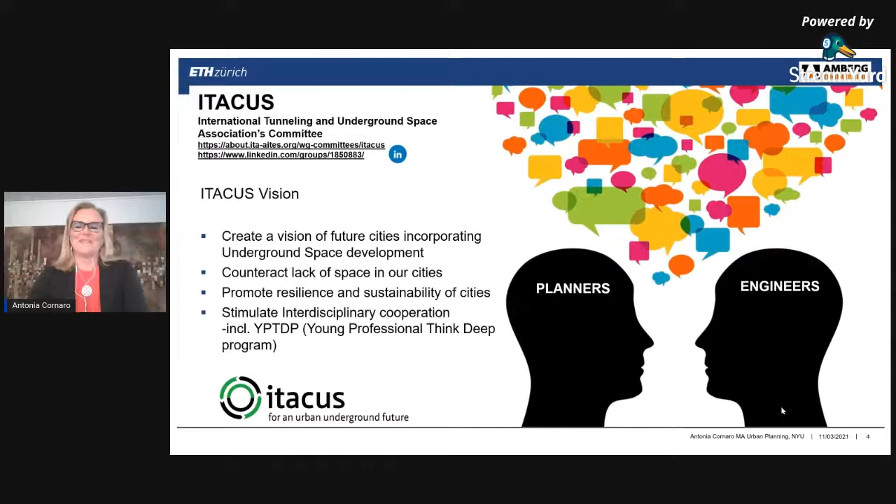I want to also start by saying about ITACUS, the committee I co-chair, that it's very much a committee that looks at a vision of future cities incorporating underground space development. We very much foster a dialogue between planners and engineers and everyone really working in the built environment, geographers and geologists, developers, environmentalists, to name a few, as well as architects, of course.

This is our committee. I'm showing you this because we're a very active committee with worldwide participation and representation. Follow us - we have a LinkedIn page, ITACUS, and we have the web page of the ITA as well. We give a lot of webinars at the moment since we can't travel to congresses in person. So please follow us and join us for great conversations on thinking deep.

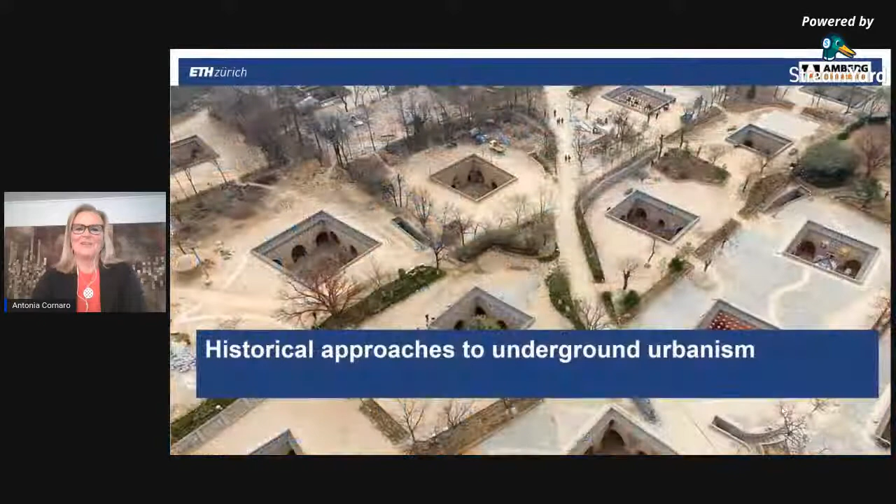Today I will start with the historical approaches to underground urbanism and show you a bit on these yaodongs from China - courtyard dwellings dug into the soil in this very hostile plateau in terms of climate. It was very windy, and the people there had refuge. These dwellings are used till today and very popular because climatically they give the residents a very cozy shelter. They are dug in vertically down, and then the rooms are tunneled in sideways.

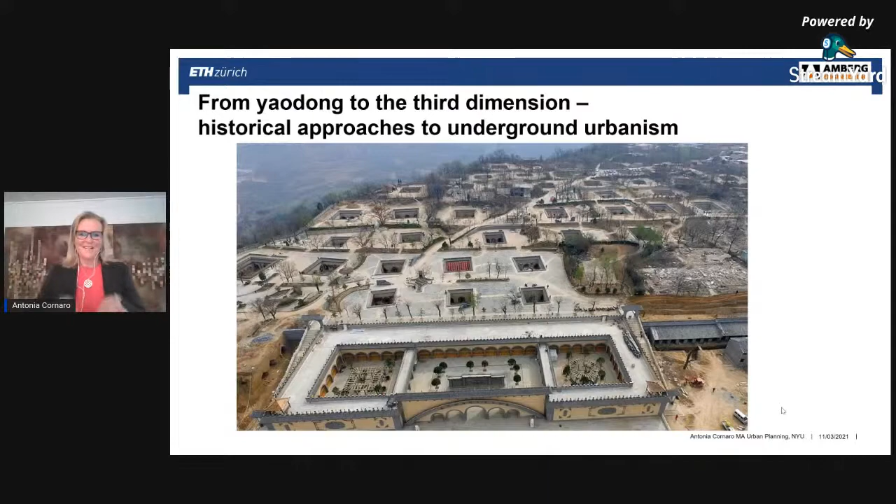Here you see what they look like. And what is great is that you can even bring trees in to the -1 level, and it's like a sunken courtyard development, right?

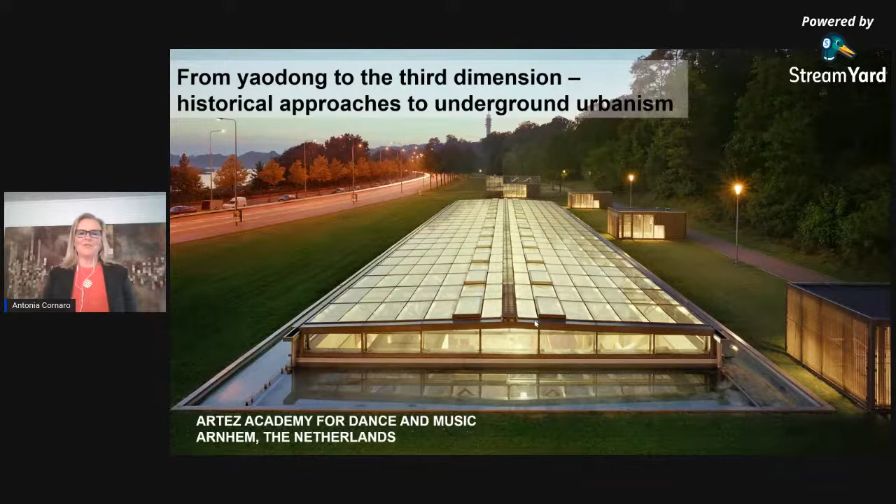How do we bring this form into today's world, into today's underground urbanism? Here, for instance, is an example of the ArtEZ Academy for Dance and Music in Arnhem, the Netherlands, where the faculty had to expand but was out of space and couldn't expand above ground because it's a protected World Heritage site, the Rietveld Academy. So the architect said, let me develop something underground.

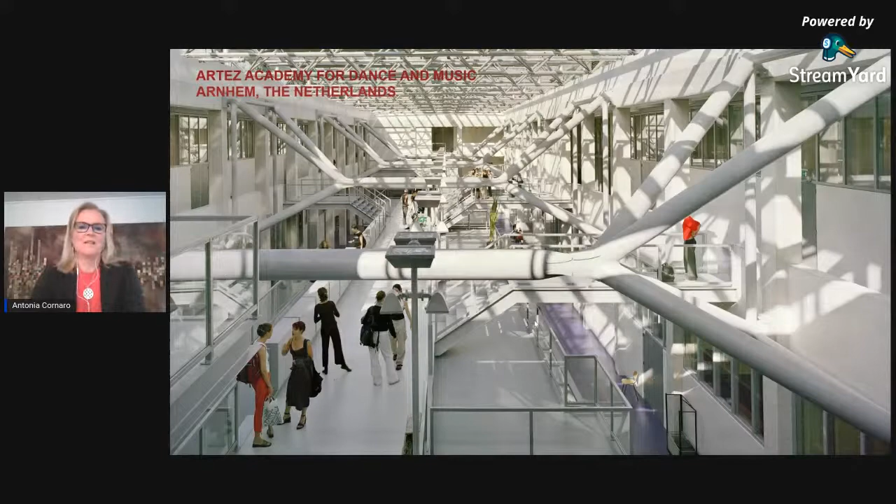It was faced with suspicion, and people were thinking this wouldn't work. But now it's extremely popular, and you see how the space is filled with light. There's a side of light to the sky, and in the room you don't even feel like you're underground. Everybody loves the space, and at the same time the surface remained completely intact, with no obstruction of vision or anything.

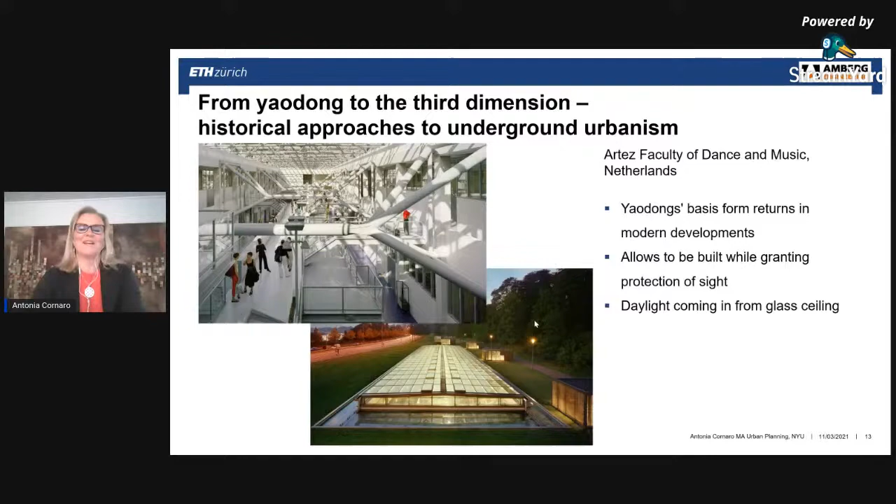Another modern example of how we can take this Yaodong concept forward is, for instance, here in Seoul, South Korea, the Gangnam International Transit Center. This was developed by Dominique Perrault Architecture, and it really connects the Gangnam district in Seoul with another major avenue.

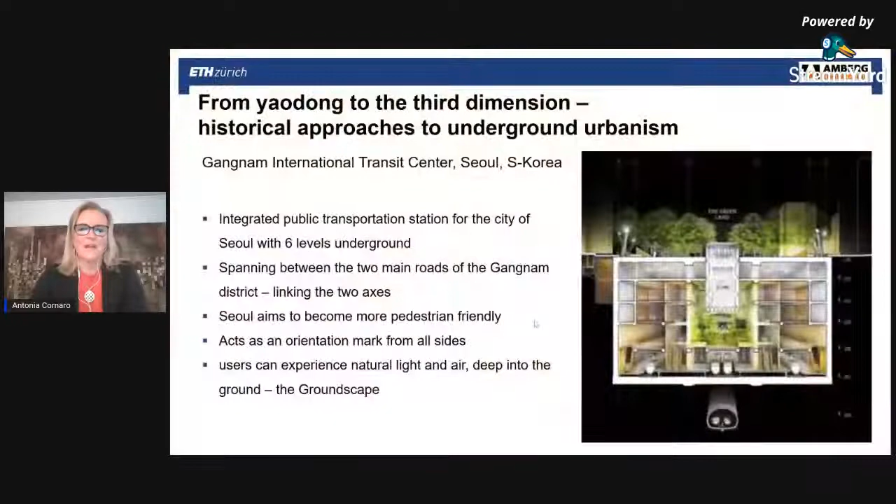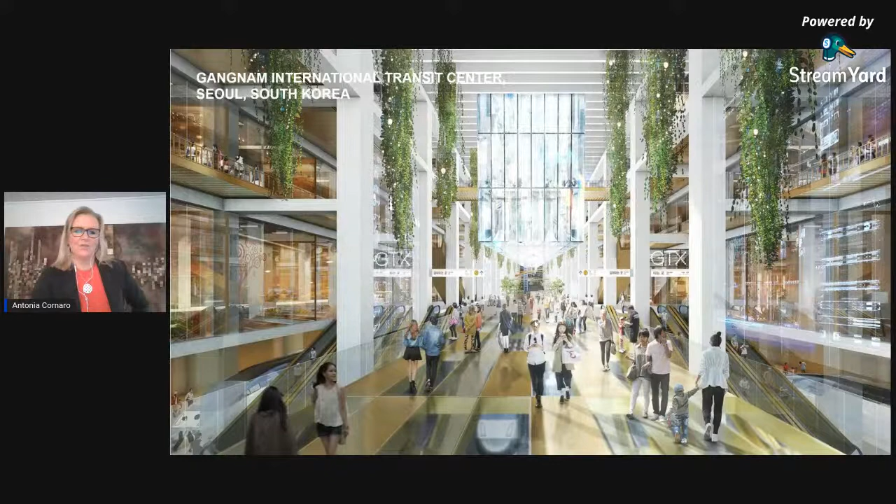And Seoul said we need more green spaces, more open spaces, and we need to make it more pedestrian friendly for our population. Here you see what this light walk will look like, basically spanning a large section of the city with 6 underground levels, connecting to the metro, to shopping, to offices, and even to park spaces underground. You see the lightway on top — that is the linear park on the surface.

Now, I said in the beginning that we have the Yaodong concept, which was basically dug down vertically into the earth, like you see here on the right. But also, since prehistoric time, people developed cave-like dwellings, man-made caves, like this cavern here on the left. This is taken from the long-term strategy for cavern development from the city of Hong Kong, which is really thinking about how we expand in the urban core going vertically down, and how we apply certain uses and relocate them into caverns in the hillsides around the city.

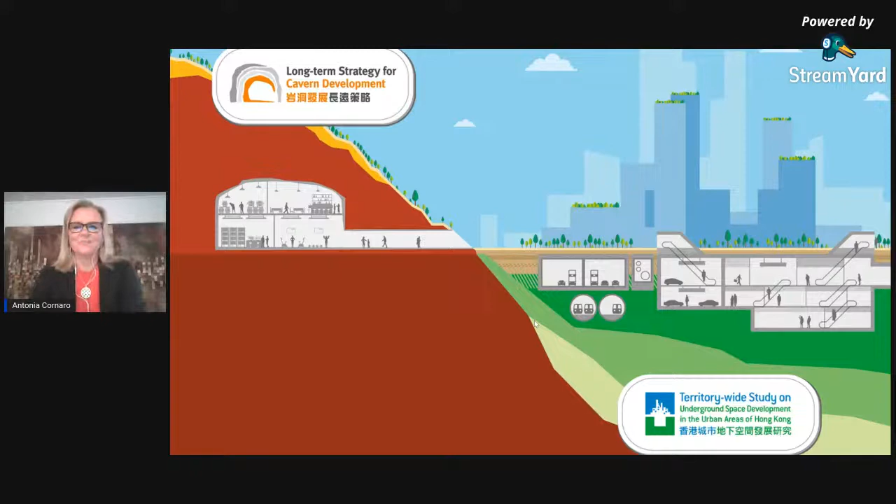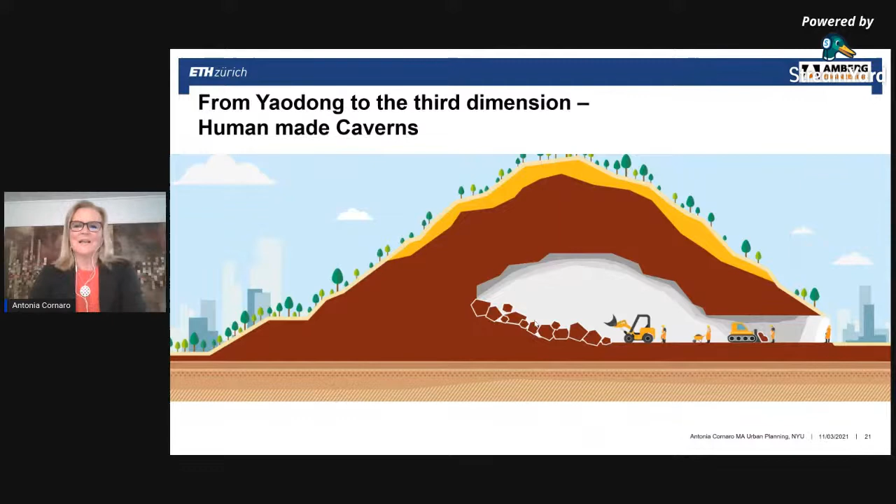These are how one basically makes caves — you're all in the tunneling business, so you of course know about this. And we nowadays have a lot of applications in terms of uses for these caverns.

So this is quite an exceptional one: for instance, a swimming pool in Finland that doubles up as a people shelter in times of emergency.

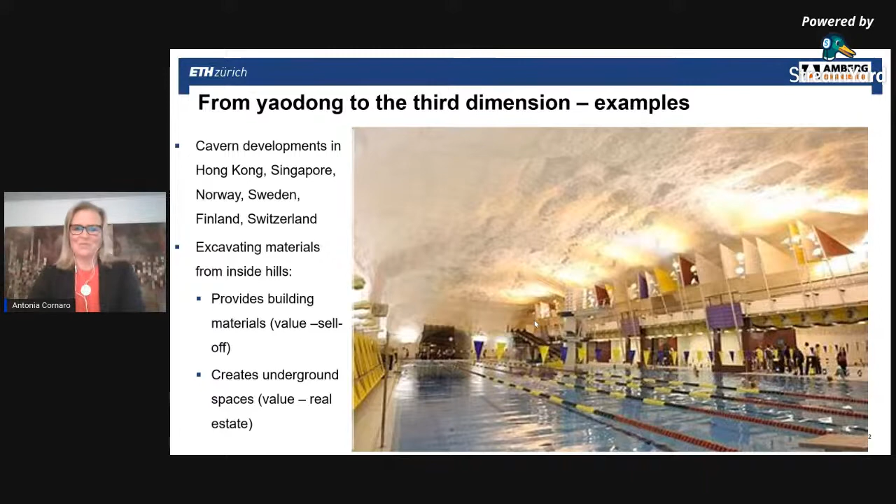In Hong Kong, we're also looking at several large facilities that need massive amounts of space on the surface of the city. Here, for instance, prime waterfront development will be relocated into the mountain hillside. Amberg Engineering is doing a study for the city of Hong Kong together with local partners on this — not just to locate sewage treatment plants in the hillsides, but also other uses that need a lot of space in the core city.

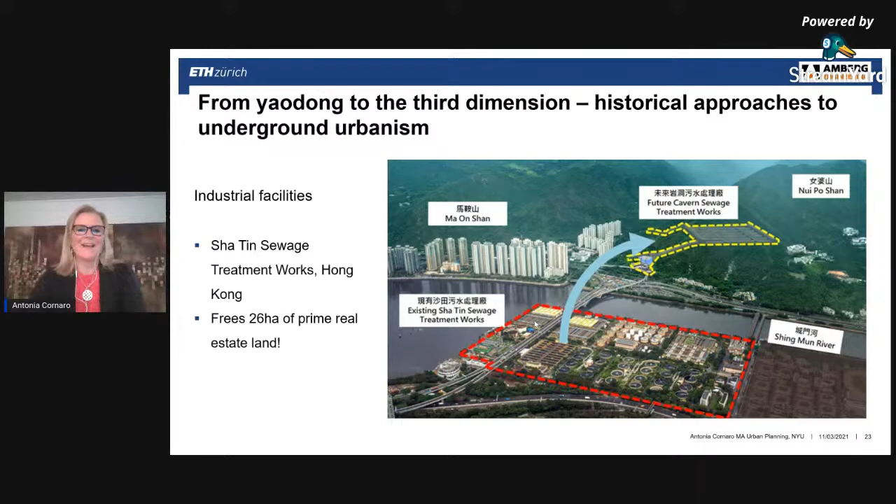For instance, data centers, but also laboratories — things that can easily be off-center and in a cool, safe, protected environment in the mountain, in a cavern. Here you see one that's already realized in Hong Kong, a smaller one. The planned one will be much larger.

But also in Switzerland, we are applying very innovative uses for these caverns. For instance, we're working on prototyping for data centers in underground caverns, and that is all to be seen in the Hagerbach Test Gallery, a large gallery and cavern network an hour from Zurich, where I live. There one can prototype and test applications one-to-one.

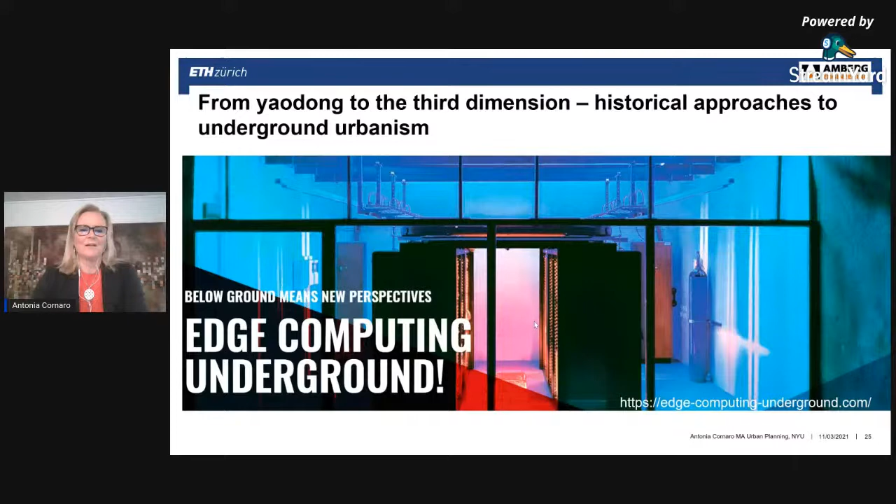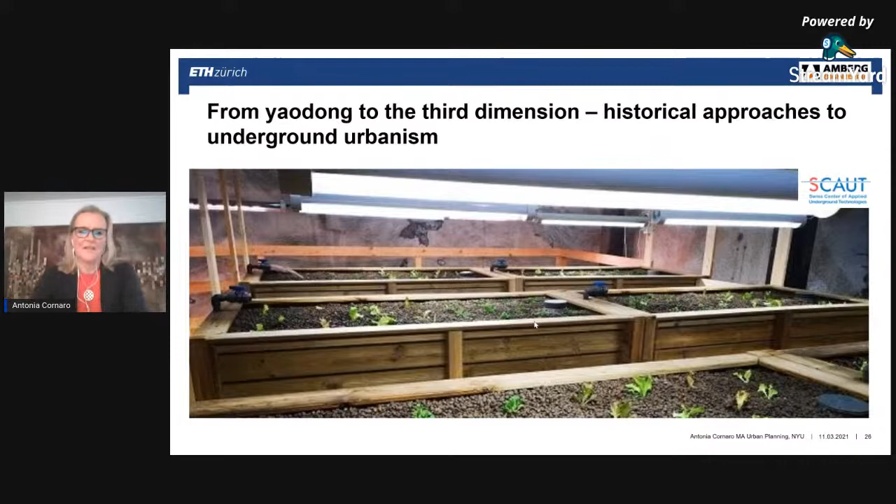We're also working on a prototype of underground green farming. It's not the greatest picture, but we're really growing greens and salads underground, in the cavern, because what we want to demonstrate is that we're running out of space on the surface, and we need a lot of land and water, and we're also very weather dependent on the surface. Here we have the advantage — we can grow 365 days a year in a sheltered environment without pesticides, and needing very little water.

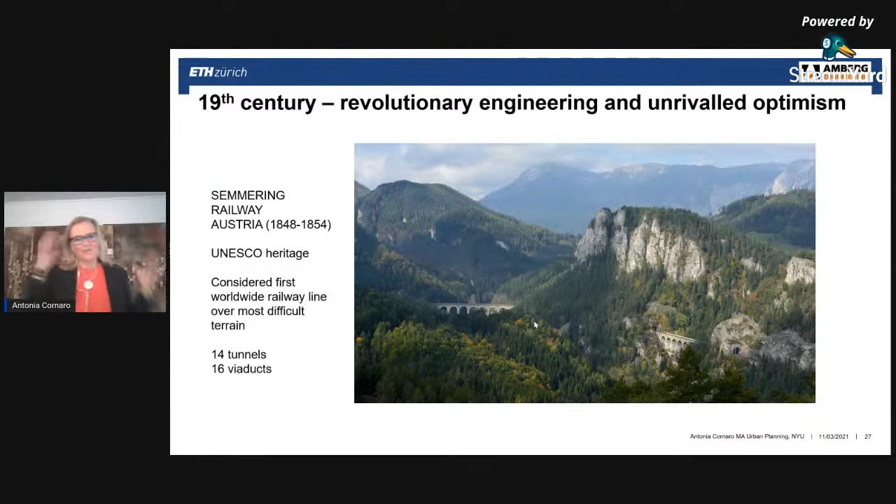A quick look back, because I said to you I'm covering a bit of the past to the present to the future in terms of tunneling.

We had this revolutionary engineering and unrivaled optimism going on in the 19th century when we first expanded our rail networks. This is supposedly the oldest such difficult stretch of rail connection, built from Vienna to Trieste, from Austria to Italy, bridging the Alps, with very narrow gauges, difficult gradients, and very difficult terrain. You see it needed viaducts and tunnels. Now it's a UNESCO World Heritage rail line.

And a base tunnel is being built underneath to really increase the speed and reduce the travel time. But at the time, this was considered revolutionary, in terms of covering space, conquering terrain, conquering difficult terrain, and really conquering time as well, because rather than having to go with the horse carriage over these difficult alpine passages, the train was significant, huge progress, and tunneling was a big part of that.

And what I want to point out about that is this revolutionary engineering and unrivaled optimism that was taking place at the time.

One thought of projects like the tunnel below the Strait of Gibraltar, the iron tunnel below the Bosporus, the tunnel under the Sont connecting Denmark and Sweden. All of these projects took like 100 years before they became a reality. And some are still on the drawing board.

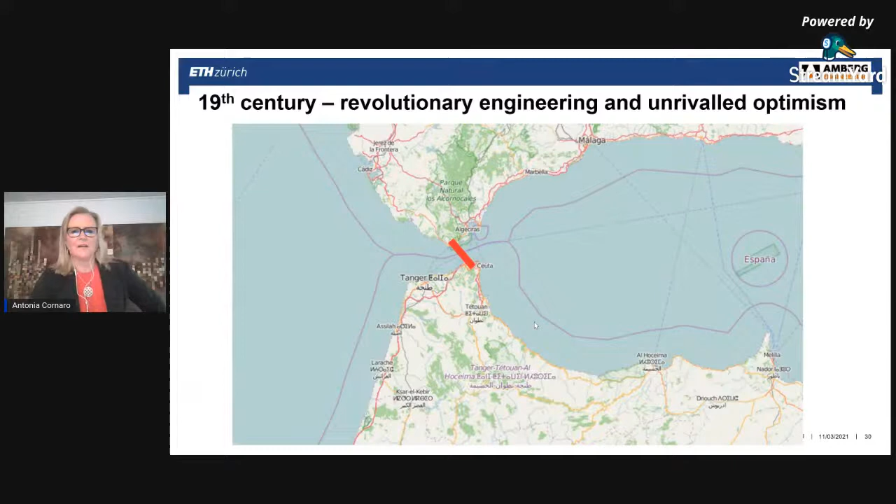Here you see the one on Gibraltar connecting Northern Africa and Spain. We worked on this feasibility study, but you can imagine how difficult it is to bridge two continents along a major fault zone. But not only that, there's of course the political aspect. It has to be the right geopolitical project. And at the moment, this is probably off the drawing board.

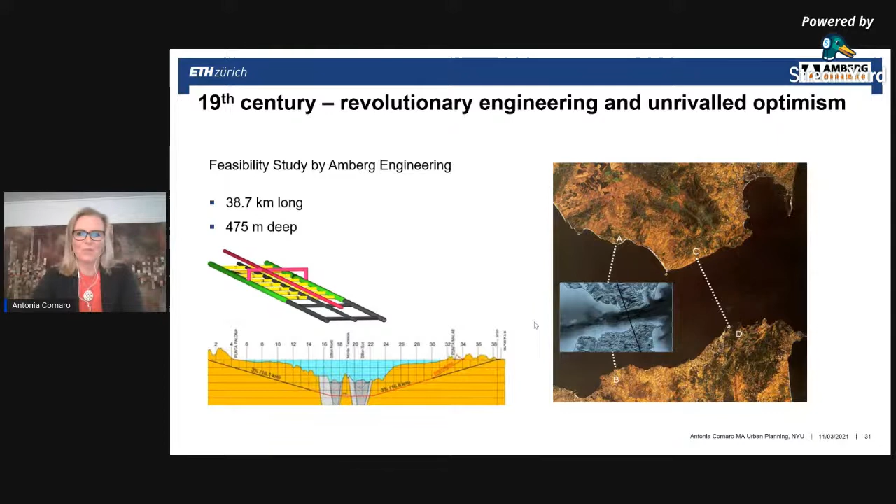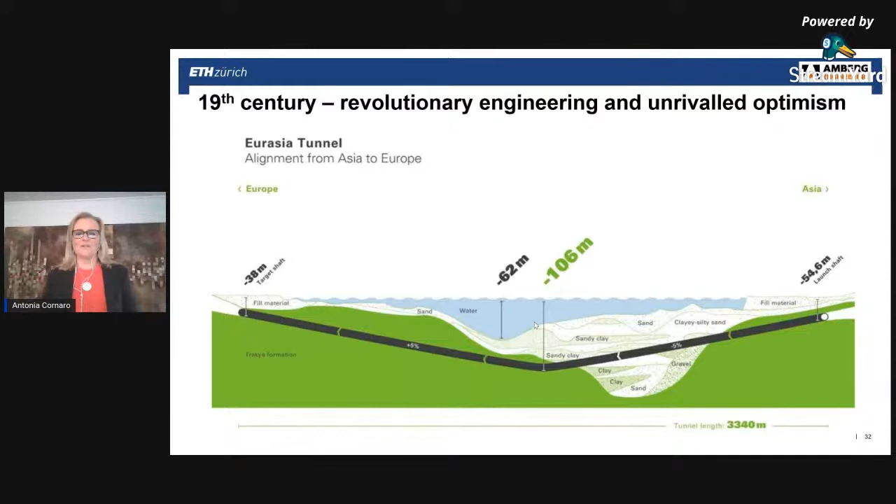But I'm sure this will once again be talked about in the future and probably realized, like this project of the Bosporus crossing, tunnel connecting Asia and Europe in the city of Istanbul, which was also a huge engineering feat to get realized.

As much as the tunnel connecting Denmark with Sweden, really creating out of two different countries one economic zone between the cities of Copenhagen and Malmö with this tunnel. Here you see the bridge, and then the tunnel disappears underneath the sea and connects to the mainland again.

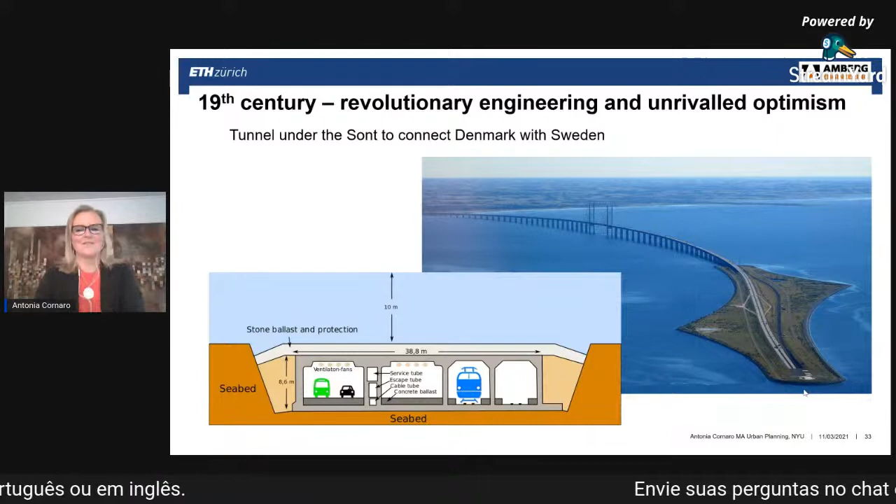So the art of convincing is what is needed, especially back then. This is, for instance, the first under-river tunnel, built by Brunel, a very famous British engineer at the time. He was convinced he could do this, but his tunnel kept being flooded, and he kept trying.

And of course, it's a trial and error thing. He had to then convince his investors and the major politicians backing this project to come into the tunnel and have a banquet after he managed to make it dry, saying, we're getting this project done. They were so amazed by this that they said yes, absolutely, and kept backing him, although the project was delayed and took more time.

But what I'm saying is it takes this optimism to really revolutionize engineering. And I think we have really managed that. And in the sense of urbanism and underground urbanism, so much has happened as well.

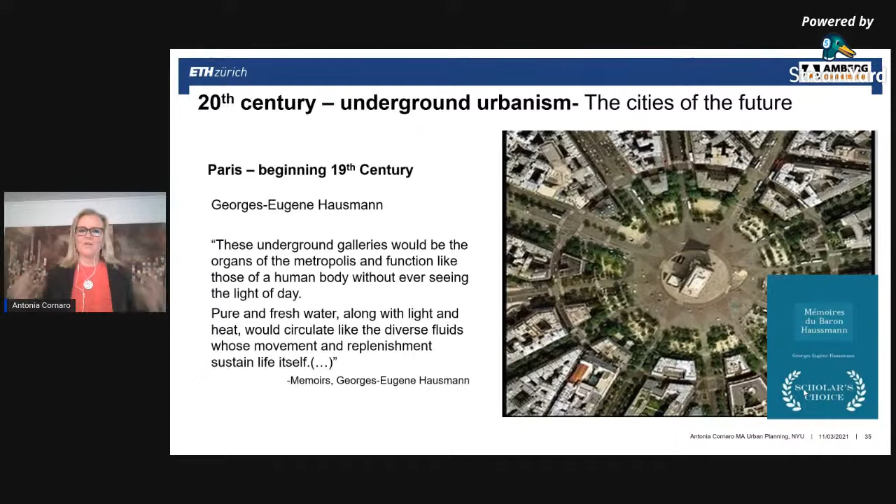In the beginning of the 19th century, Paris was first laid out in terms of these grand avenues and boulevards. It was actually this gentleman, Baron Haussmann, who said the underground galleries are kind of like the organs of the metropolis, functioning like that of a human body without ever seeing the light of day. He also said we can carry pure and fresh water, we can carry light and heat, and all this movement can be in the subsurface, and that will actually help us develop our city.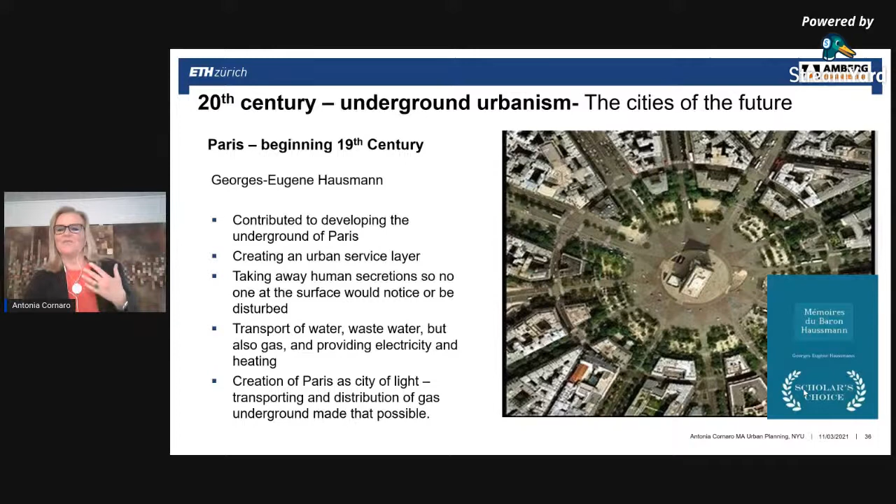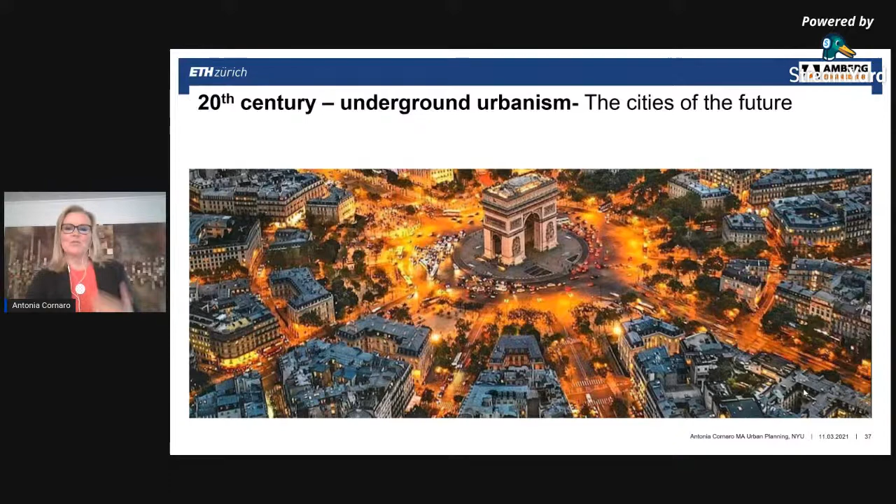He really created this urban service layer for Paris, transporting waste and gas, and amongst all he wanted electricity and heating, and he wanted Paris to be the first city in Europe that would have light. That's why Paris is called the city of light, because it had this very early network of gas and electricity distribution in its underground. To this day, we all know it as the city of light.

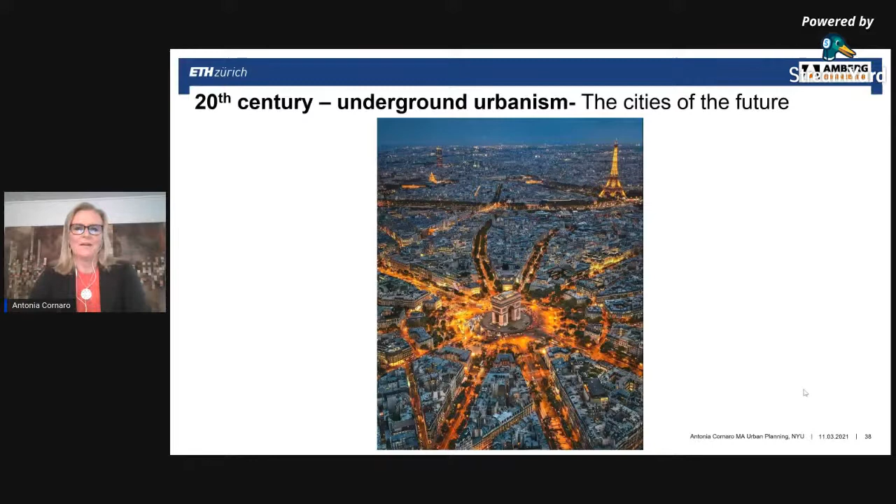But it took very early thinkers to come up with schemes like that and push them through. Another very early thinker in France that I want to highlight is Édouard Utudjian, because he was really the first who created a committee on the urban underground, interested in underground development.

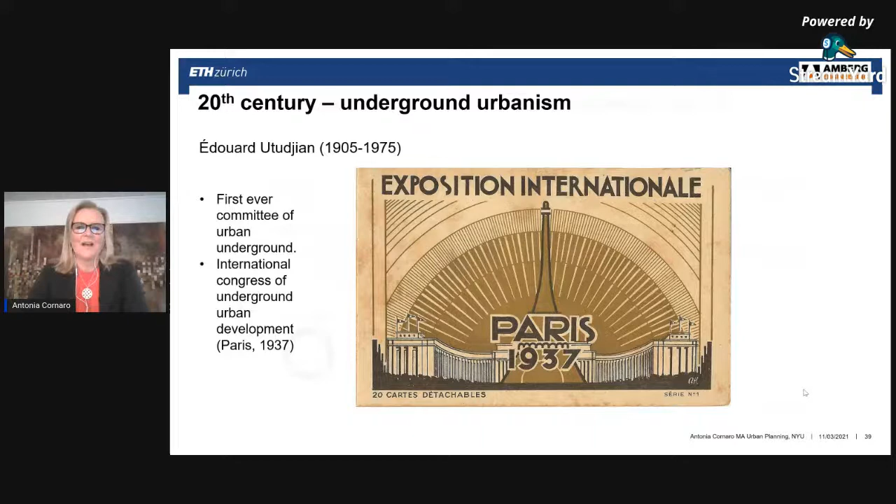And he made an Exposition Internationale. He's really the forerunner of the French Tunnel Association, which is very active to this day. And all these early urbanists and thinkers were sort of the forerunners of what is today the International Tunneling Association. First it was called International Tunneling, and now it's called International Tunneling and Underground Space Association.

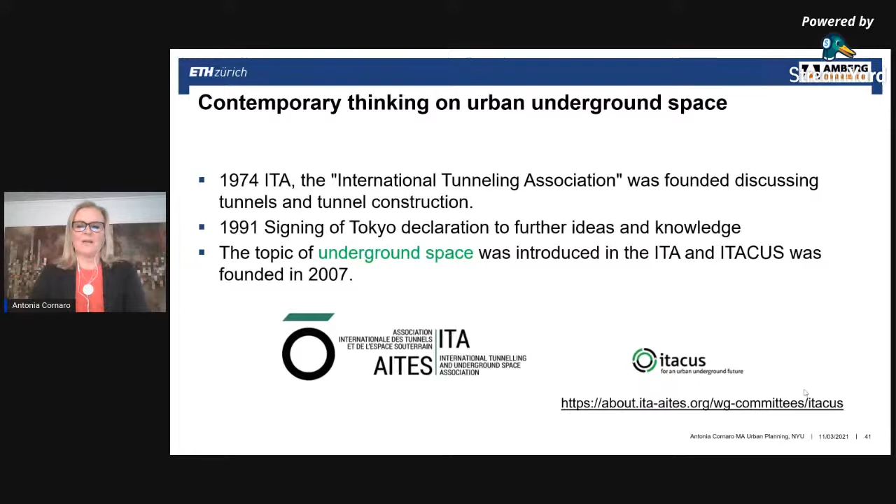Because we're not talking about tunnels being the linear connectors for transport or utilities and the like, but also the whole space in the subsurface and how that is used. And that's also where ITACUS, the committee, comes in that I co-chair. Here you see the web link of the committee, which is also found on the ITA website.

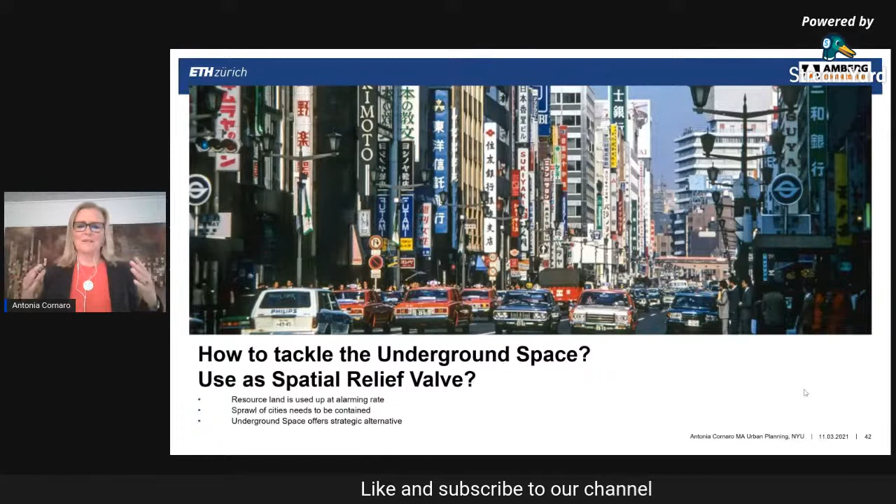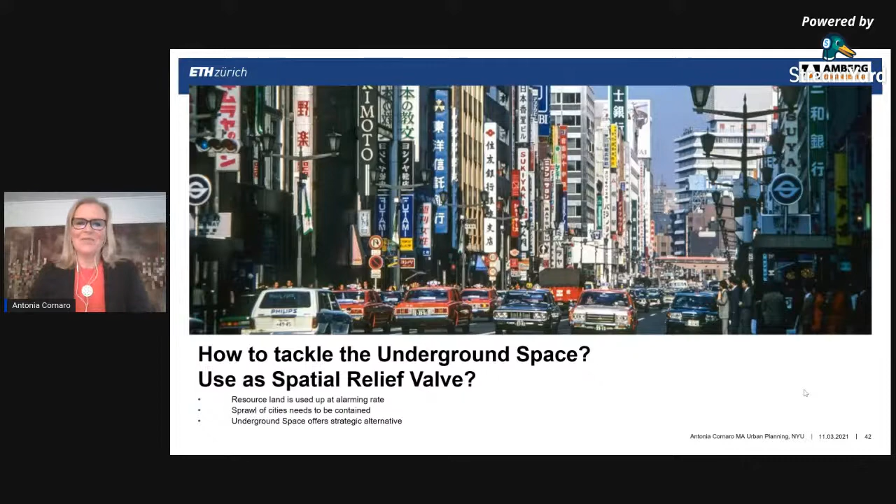Now what we need to ask ourselves is how do we tackle this underground space? We've seen in the past, people already used it for habitation very early on. It protected them, it was a shelter. But then it more and more gradually was seen as this urban service layer, like let's ban everything that we don't want on the surface into the subsurface.

And that is something where I think it is a much better resource than we think, and that we're giving it that status. So just quickly blending in this sustainable cities and communities goal of the United Nations - there are 17 goals in total to improve our cities and life on the planet going forward, but the one on 11 is the sustainable cities and communities one. And we have to ask ourselves, how can we use the subsurface to make our cities more resilient, more smart, more sustainable, and more livable?

How can we future-proof our cities using this precious asset that we have below our feet?

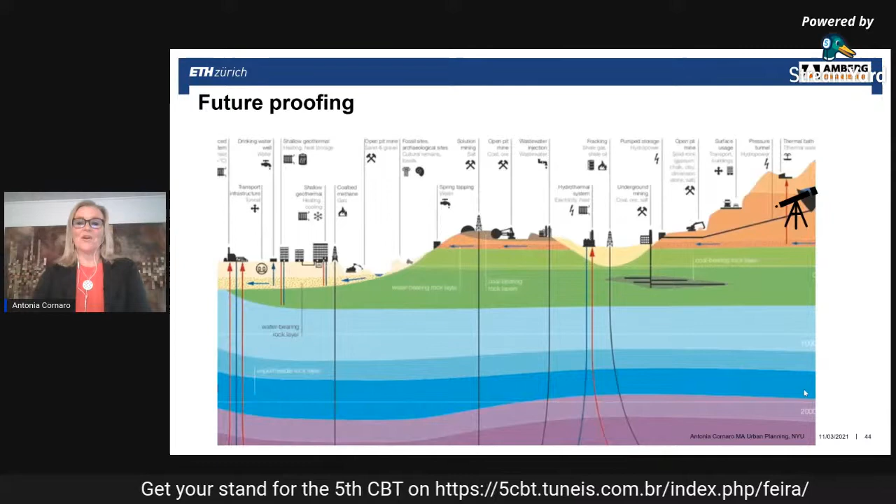And this is where disaster risk reduction comes in, and there's a whole United Nations office dealing with that. ITACUS got them to incorporate this wording in their policy statements, saying that it was important to design large underground spaces, for instance car parks or tunnels or other underground structures, because they can serve a variety of disaster risk functions. They can hold off stormwater when a city is flooded, as temporary water retention. They can be refuges, vital connectors for emergency relief, but also communication lines, and then of course for water, energy, and waste removal. So all these are incredibly important functions in keeping our cities afloat.

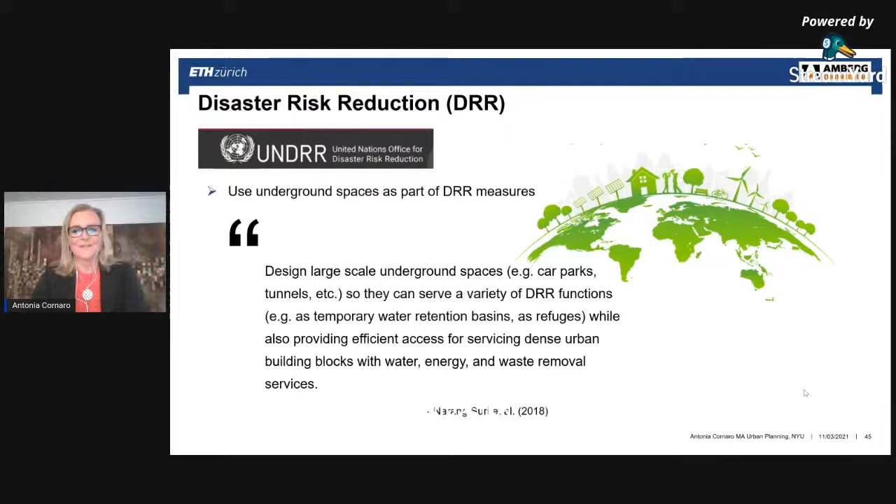Here we see some examples quickly, like the threats of climate change. We have more frequent, highly intense precipitation in our cities, and when we don't have urban drainage or sufficient capacity, you all know what happens - our streets get flooded. There are some very clever examples, for instance here in Rotterdam, where this underground car park can also function as a stormwater runoff facility.

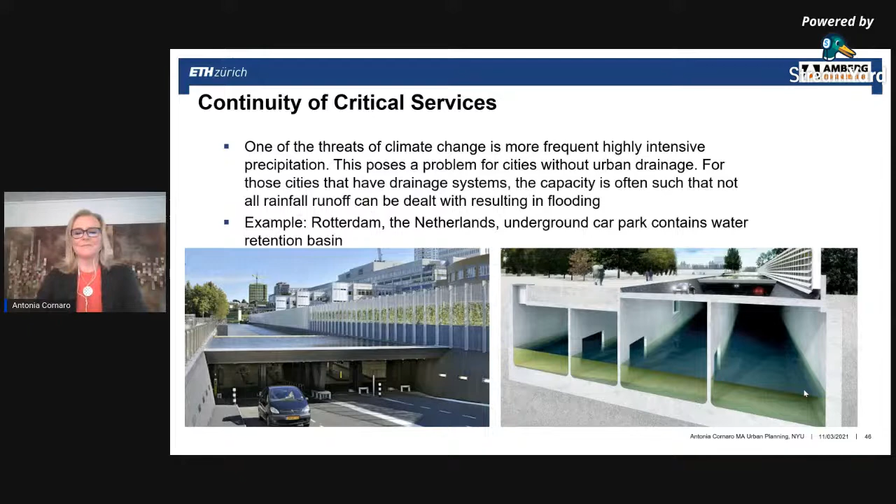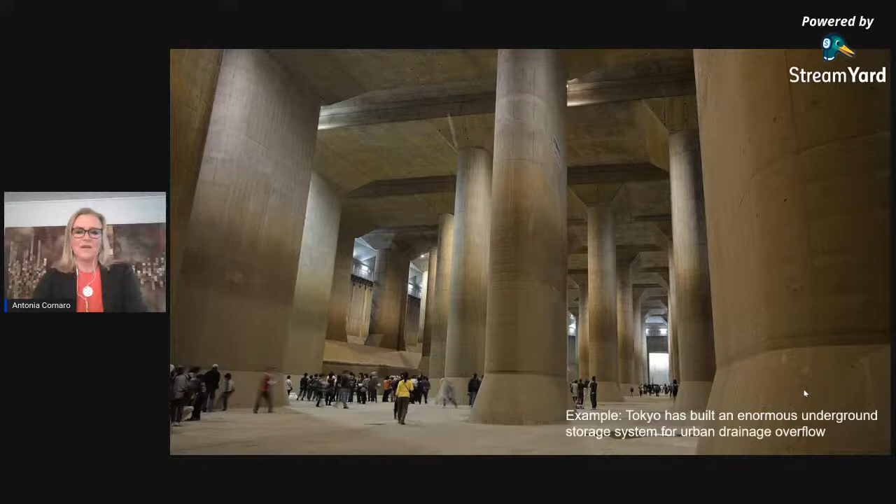As first one deck gets closed off for parking, and if necessary both decks get locked off for that. For instance, Tokyo has built this enormous underground system for urban drainage overflow, which is like a temple-like structure. And here you see how, for instance, the city of Prague is dealing with a 90-kilometer long network of utility tunnels serving the city - pipes, steams, water mains, high and low voltage cables, and telecom.

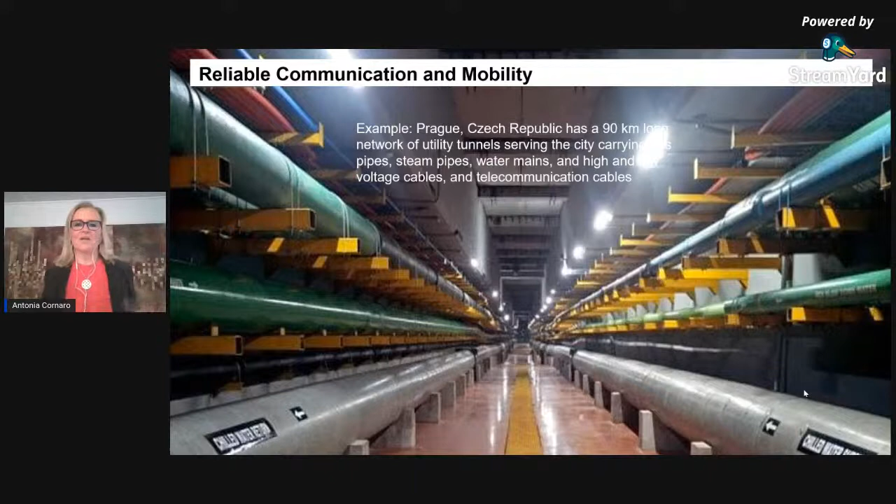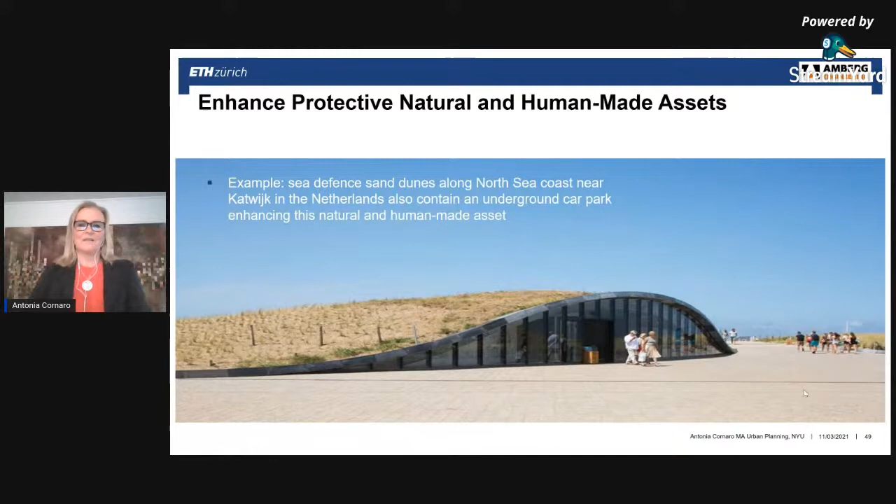And also we have sea defense measures that can double up with an underground function. For instance, here in the Netherlands, that is a sea defense dune to the North Sea, which is very strong in the Netherlands, a very low-lying country. And they made these very clever structures that have a dune-like effect and shape, but at the same time are underground parking garages.

So we really need to think about how we can use our infrastructure in a smart way and also use it for dual uses, because at the end of the day we want our cities to be open spaces as well, where people can play, do sports, get fresh air. And these open green spaces really help us filter out CO2 and reduce temperatures and avoid heat island effects.

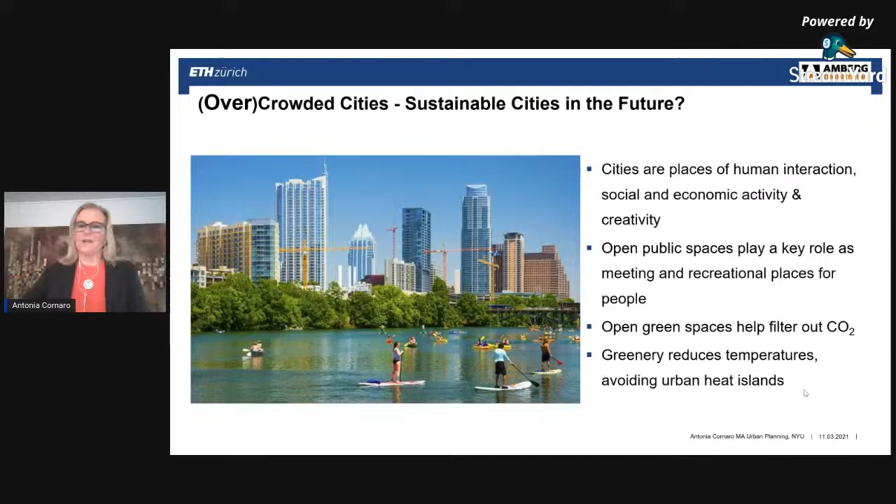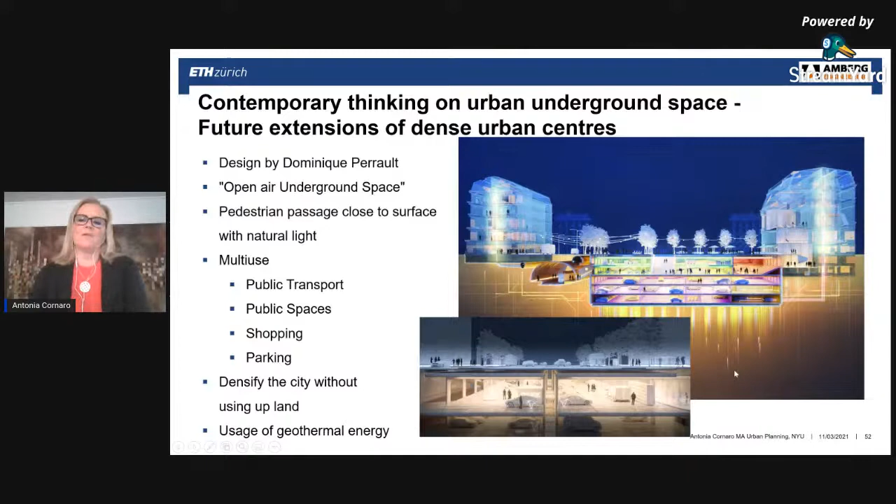And there are some architects who are now coming up with really smart systems for city centers. This one is for Paris by Dominique Perrault Architecture. You basically open up the underground space and connect it with the surface. You have the pedestrian uses very high, close to the surface level, and other uses like parking, shopping, public spaces, offices, and of course utilities. You can densify the city like that without using up land, and not only that, but it's cleverly powered with geothermal energy. So this is what this scheme looks like.

We really need to future-proof our cities, be it against natural disasters, population growth, or climate change. The challenges we're confronted with are manifold, and a functional infrastructure is definitely key for the future.

If we look at this Hyperloop system that's now being proposed in many parts of the world and being developed as we speak, we have to ask ourselves: this will be very exposed if it's on the surface, on these stilts. That should probably be in the subsurface where you can create unhindered connections much easier.

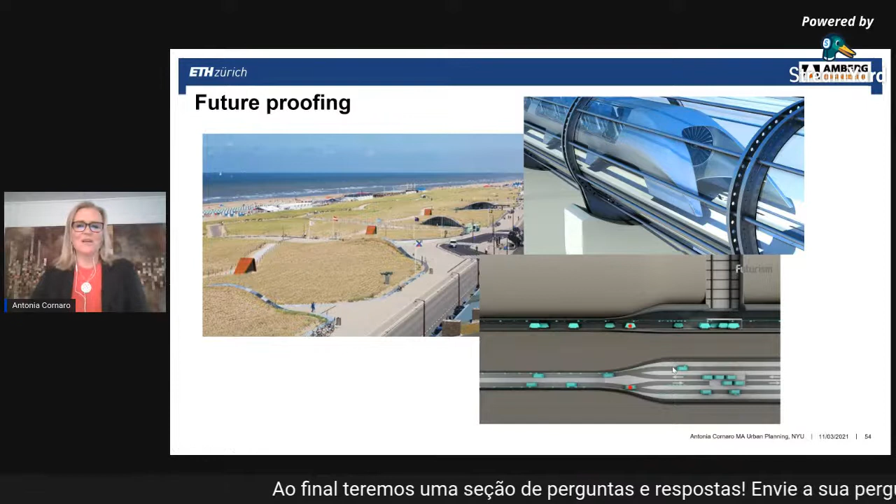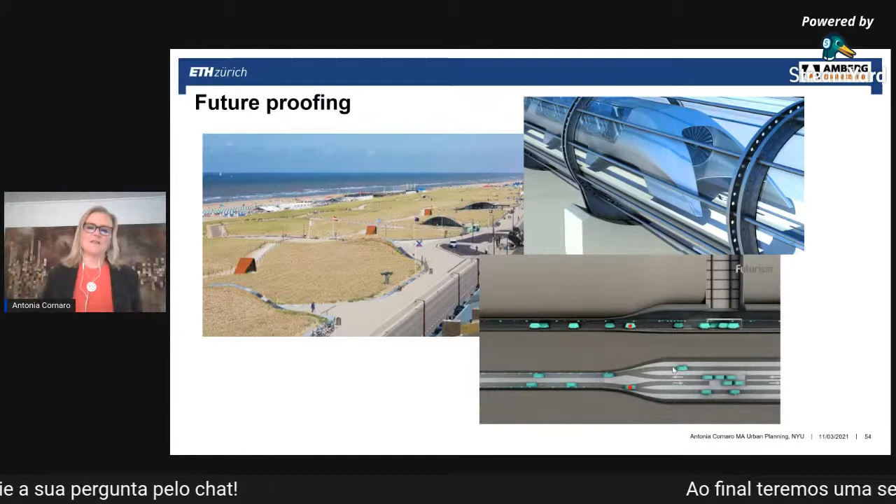Like this system here, Cargo sous terrain, a Swiss project that will deliver cargo underground. It will eventually span the entire country, but for now a first stretch between two major cities, Zurich and Basel, is being designed.

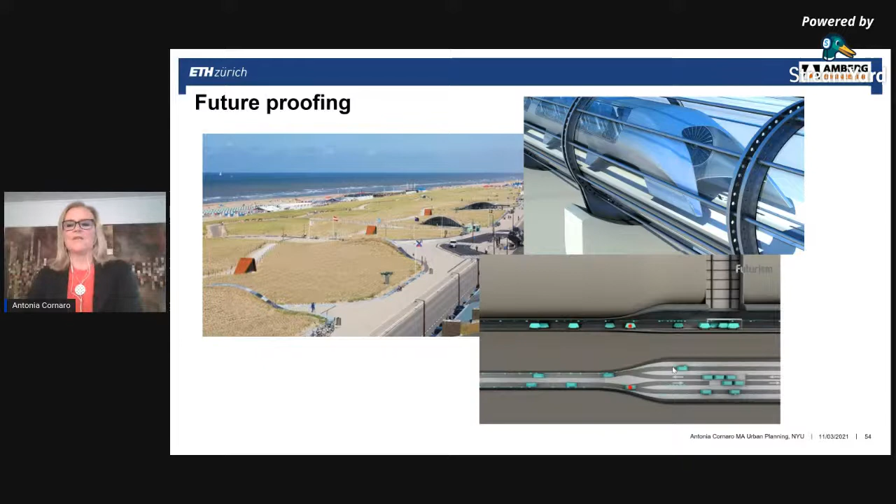The advantage of such a system is we can deliver 24/7 and we're not cluttering up road space, which is crazy because the growth in cargo delivery is skyrocketing and the roads cannot hold the truck traffic anymore. So this is a very smart system that's also very environmentally friendly.

We also have to think of our multimodal transport hubs as having various layers, including in the subsurface, and really connecting them, integrating them into the central areas of the city with pedestrian plazas, trees, solar lighting, and clever energy systems that clean the air, that make us breathe, and at the same time help us catch our train home or metro or bus, or quickly reach our office when coming from outside the city.

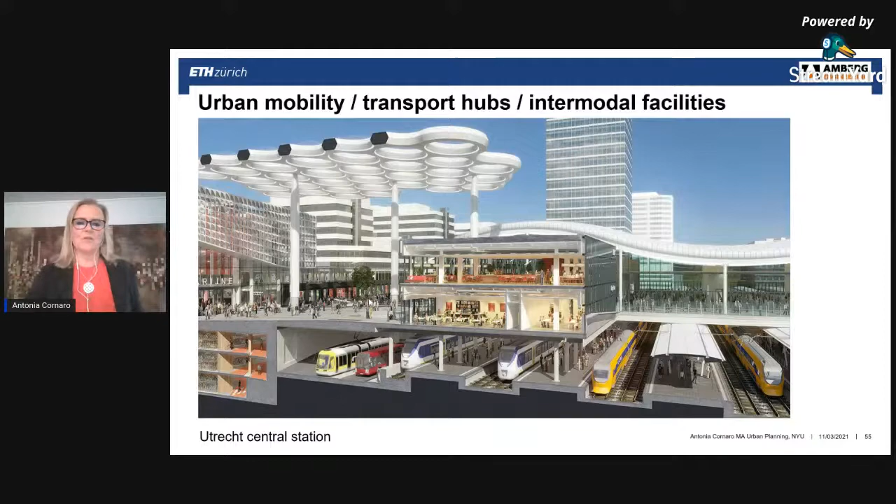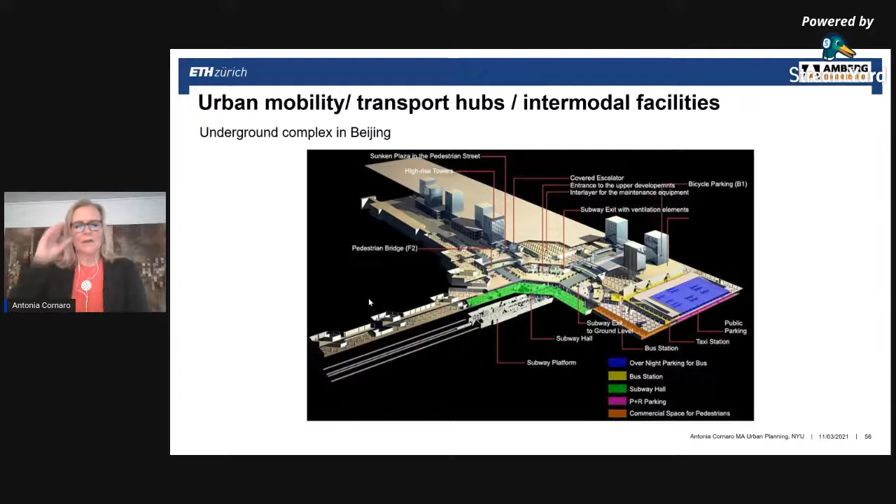This is Utrecht Central Station in the Netherlands, the country's largest station, and it's had to double up in capacity recently because it couldn't manage the growth, and the concept seems to be very functional. Also in China, one realizes many well thought out underground complexes in all the major metro stations and intermodal hubs.

When we tunnel, we can create spaces on the surface. Like here you see Madrid. We have a situation with the surface inner-city highway in place on the left, where we can't access the river. We have pollution, filth, and crime happening because these places are not safe and they're not nice and not accessible.

And the neighborhoods around are therefore deteriorating. Here, of course, it's already being cleaned up, but I can show you other pictures from before where it really didn't look good.

And then on the right, you have the tunnels in place. The whole multi-lane highway system was tunneled, and Madrid gained 1 million square meters of green space. Obviously, real estate prices went up, and it's such a respite for the Madrileño population to have this green lung in the city center.

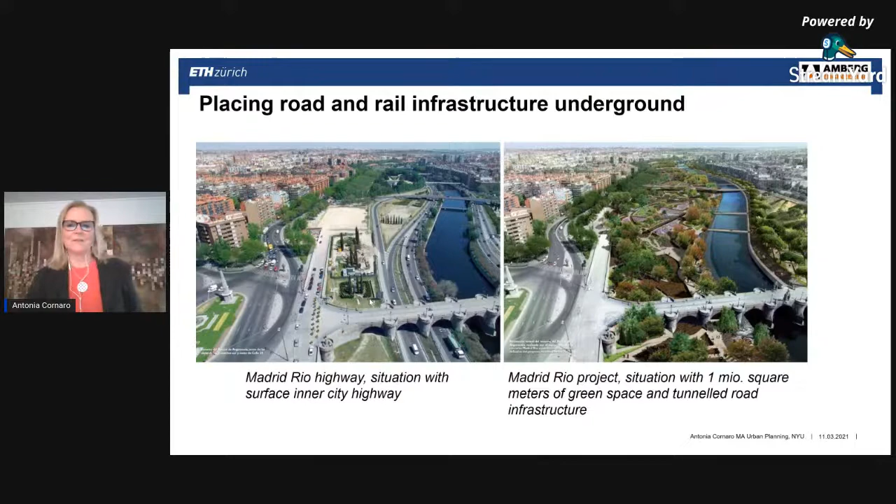So when we tunnel and build infrastructure projects in general, we can't forget that we're actually building for people, and we're building valued underground spaces where we want people to feel comfortable, where they can also relax, meet, or enjoy.

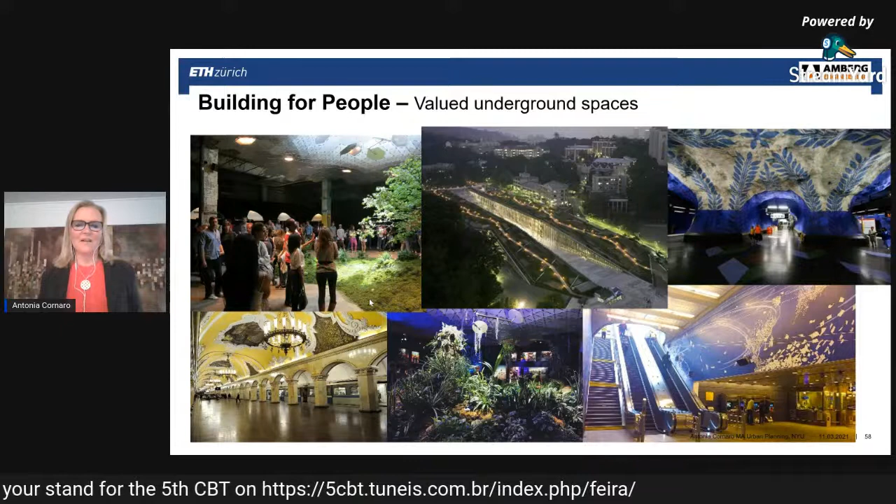There are several pictures here, but the top one in the middle is the new women's university in Seoul, which was groundscaped into the earth, creating a park on top. The one on the bottom is a plan for an underground park in a former trolley terminal that's no longer used, bringing in fiber optic light down there.

Now I want to show you a video on Porto Maravilha, because we haven't talked about Brazil, but this is happening when we take the road infrastructure underground. Please maybe turn your volume up on your computers or phones.

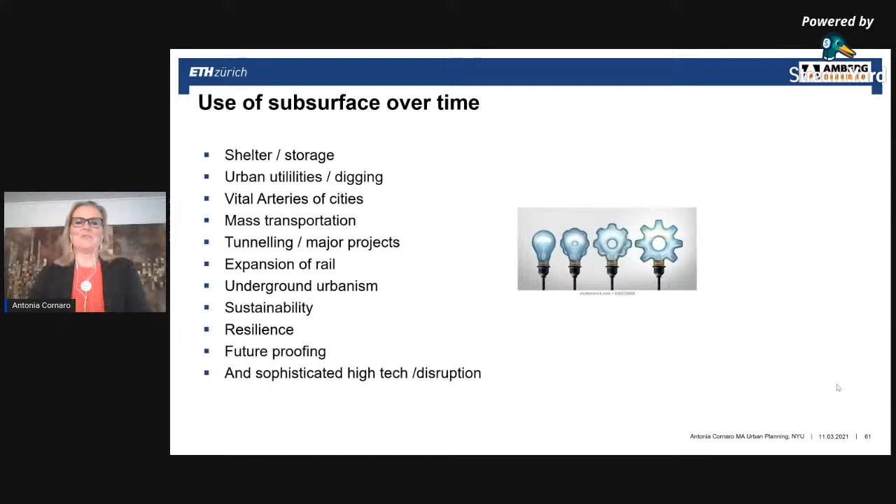So the urbanization of tomorrow really requires a very careful and optimal use of our urban space resource, because it's a resource and we're often not realizing that. The underground has space and has potential for many uses, which I think I showed you quickly during the presentation.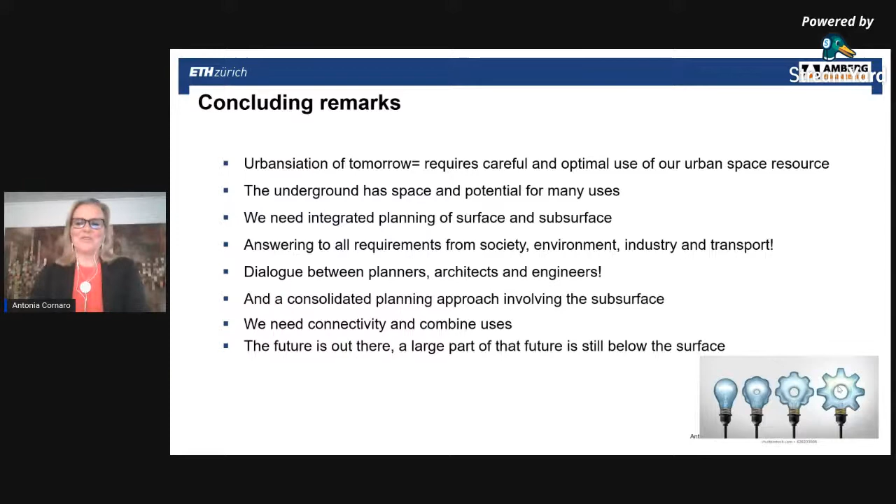We need an integrated planning of surface and subsurface. We don't want them to be separate layers, and we want to answer to all requirements from society, environment, industry, and transport. So it's a difficult endeavor. Therefore, we need this dialogue between planners, architects, engineers, and other associated professions. We also need a planning approach involving the subsurface, connectivity, and combination of uses. The future is out there, and a large part of that future is still below the surface. So help us unveil it, because space loves underground. With that, I want to thank you, and I'm very open to any questions or comments.

Thank you very much. It's a very inspiring presentation, very beautiful. I could see in the comments everybody was talking about the pictures, and it's really, really beautiful. It's also nice the part about the past, knowing how much they had to convince, like Brunel and in the beginning. Yeah, it's exactly the same.

We have lots of people watching, and then we have many questions. Everybody's saying hello, it's really a large chat here. I have to go back to see everybody. Lots of people commenting. I know that Jean-Pierre sent some questions here. Okay, so Jean-Pierre, that's also from the Brazilian Tunneling Committee.

Antonia, I believe that issues related to the presence of water in the underground, associated with possible difficulties in the aspects of ventilation, still represent challenges in the use of underground space for housing. How do you see the effectiveness of solutions to address these issues?